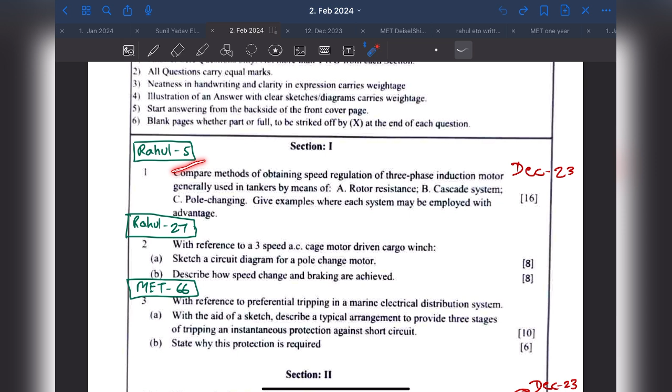Page number 5. I will just open my notes and take you to page number 5. See, the same question I prepared when I was preparing for the exam: Compare methods of speed regulation of three-phase induction motor: rotor resistance, cascade system, and pole changing. Give examples. So you can refer to my notes and also the December 2023 video. So let us move directly to the next question.

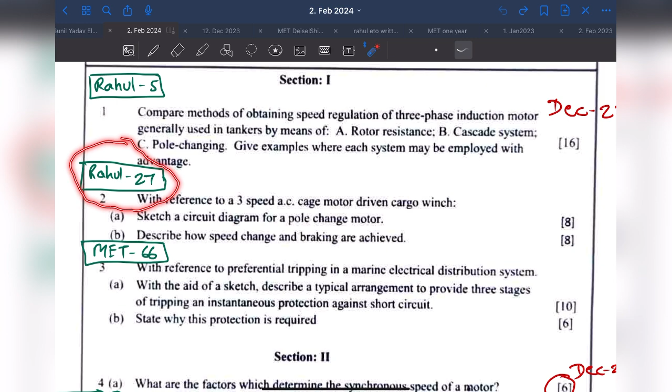Question number 2. With reference to a 3-speed AC cage motor driven cargo winch, sketch a circuit diagram for a pole change motor. Describe how speed change and braking are achieved. You can find the answer to this question on page 27 of my notes. So I will take you to my notes, page 27.

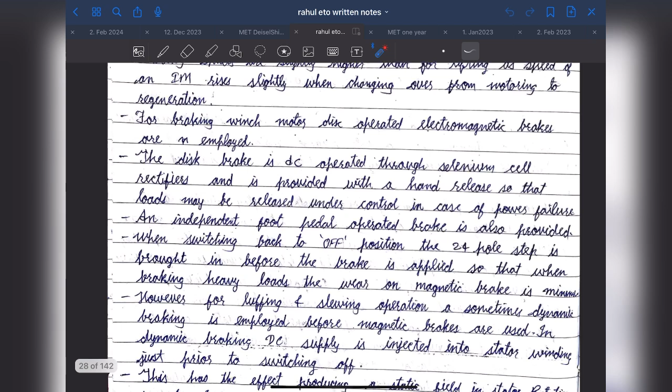So in this case, these windings are connected in parallel, which gives lower number of poles, and therefore higher speed. Different contacts will be made for different speed performance. I have explained the basic fundamental of how this happens, and the rest you can read and understand.

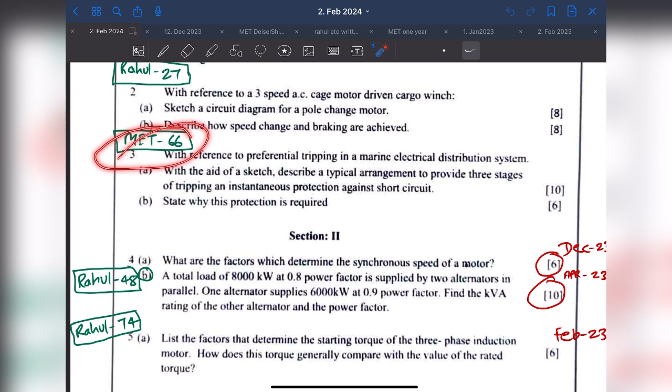You can find the answer to this question in MET 66, page number. So to answer this question, you have the diagram here and the explanation here. That's all - just memorize the diagram, practice it one or two times, and you can remember and write this explanation.

Those working in this field must be aware of what the non-essential trips are and at what stages - 5 seconds, 10 seconds, and 15 seconds. So just explain about the non-essential trips, and this is the mechanical one.

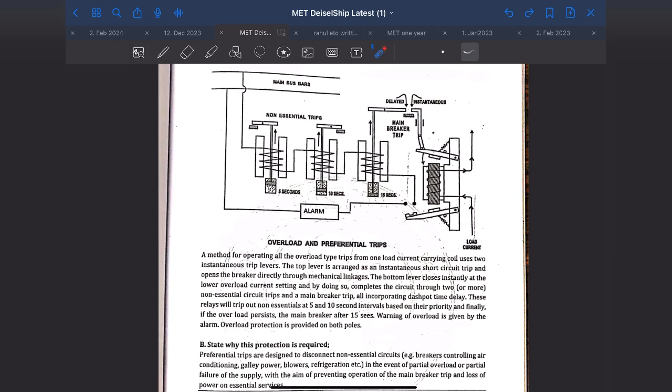Nowadays these are not used on the ship, only electrical electronics current transformers and relays are used for tripping purpose. This may be an old method, but for exam purposes just draw this diagram and write this answer. You can also refer to other books, maybe internet or ChatGPT, to get a more theoretical answer to this.

Now let's move on to section 2, question number 4a. This question was asked in December 2023. I have explained in my video of December 2023 what are the factors which determine the synchronous speed of a motor. Let's move on to question number B.

A total load of 8000 kilowatt at 0.8 power factor is supplied by two alternators in parallel. One alternator supplies 6000 kilowatt at 0.9 power factor. Find the kVA rating of the other alternator and its power factor.

This is a very easy question, worth 10 marks. Just 5 minutes you can answer this question. This question will take 5 to 7 minutes to write the theory part, and this one for 5 minutes. You can answer this question in 10 minutes, it will be easy. The answer you will find at Rahul, page number 48.

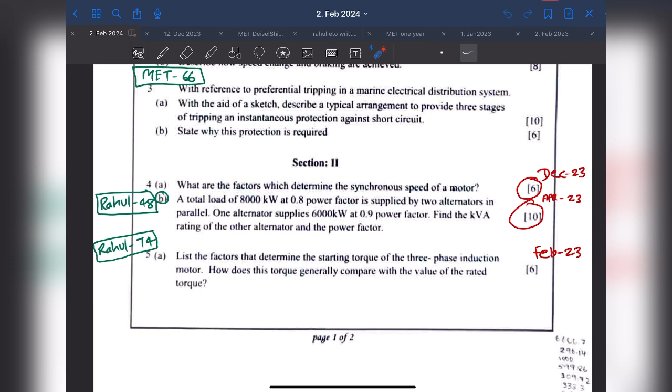Let's move on to page number 48. See the same question - this was also asked in April 2023, and I had prepared all these questions when I was preparing, so all these questions are repeating only. So total load is 8000 kilowatt at 0.8 power factor.

Now you know the kilowatt and you know the power factor, so what can you find out from this? You can find the kVA. kVA will be kilowatt divided by power factor, because power factor equals kilowatt by kVA. Now you know these two parts, so you can easily calculate kVA. So kVA we got is 10,000 kVA.

Now we can find total kVAR, which is the reactive power. You know kVA is the square root of kilowatt squared plus kVAR squared, so from this we can find the kVAR: 10,000 squared minus 8,000 squared, under root, gives us 6,000 kVAR. So this is our total requirement: 8,000 kilowatt, 6,000 kVAR reactive power, and 10,000 kVA total.

Now let's see how much generator A is supplying. Generator A is supplying 6,000 kilowatt at 0.9 power factor. So out of the total 8,000 kilowatt, 6,000 is provided by generator A at power factor 0.9. Now calculate how much kVA is supplied by A using the same formula. We are getting 6.6 MVA.

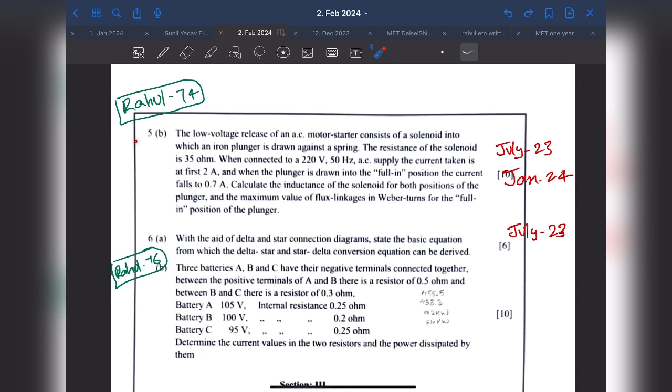We will move to the next question. With the aid of delta and star connection diagrams, state the basic equations from which delta-star and star-delta conversion equations can be derived.

A similar question was asked in July 2023, the same month in which I gave my exam, but I did not attempt this question. I had attempted the other two numericals instead. The answer is already there on page number 76 of my notes. Again, this is a theory question only from our college time.

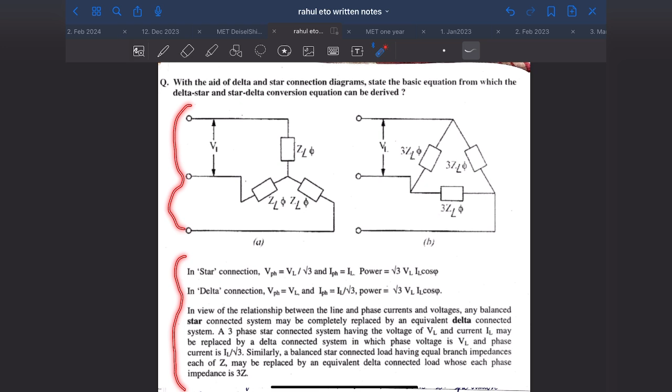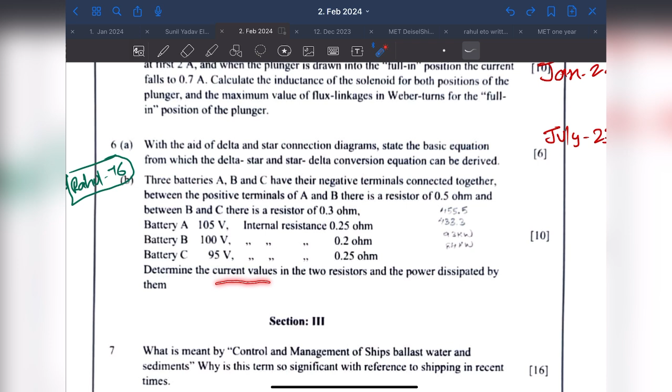Three batteries A, B, C have their negative terminals connected together. Between positive terminals A and B, there is a resistance of 0.5 ohms. Between B and C, there is a resistance of 0.3 ohms. Battery A is 105 volt, battery B is 100 volt, and battery C is 95 volt, and their internal resistances are given. Determine the current values in the two resistors and power dissipated by them.

So the answer is available on page 76 of my notes. We'll go to page 76. This is answered - first, draw the diagram as given in the question.

Three batteries are given: 105 volt, 100 volt, and 95 volt. The negative terminal of all three batteries are connected together, so we are connecting the three terminals here. Now this is the internal resistance: 0.25 of this battery, 0.2 of this battery, and 0.25 of this battery. And what is given? There are two resistances - 0.5 ohm connected between battery A and B, and 0.3 ohm connected between battery B and C. So here we got the simple diagram.

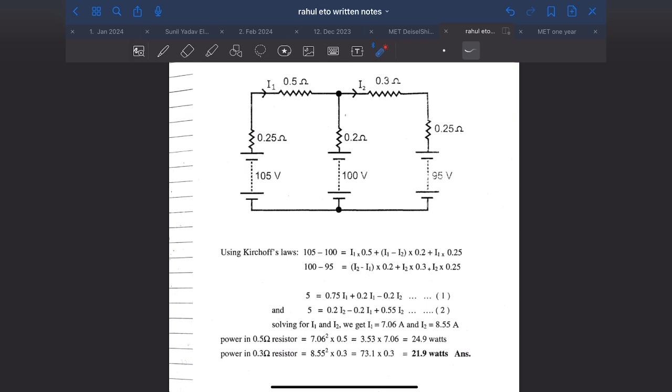Now we can simply apply Kirchhoff's voltage law here: current I1 here and current I2 here, and equate both equations, we will simply get the answer. So let's apply Kirchhoff's voltage law in loop 1.

So now we start from here. So 105 minus 0.25 into I1, minus 0.5 I1, now going downward here, minus 0.2 into (I1 minus I2), because current I1 is coming here and current I2 is going upward. So the resultant is I1 minus I2 minus 100 is equal to 0.

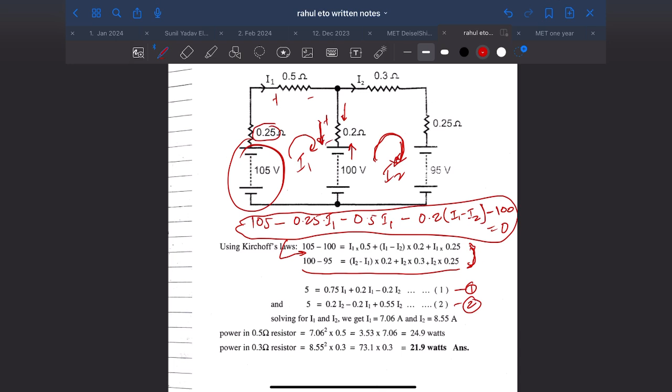Solving this equation gives what is written here. Similarly, writing the equation in loop 2 will give this equation, and simplifying these two equations we'll get equation number 1 here and equation number 2 here. We'll solve these two equations and get the value of I1 and I2: 7.06 and 8.55.

The question asks for the power in the 0.5 ohm resistor. So the power formula we already know is I square into R. I1 is 7.06, so 7.06 squared into 0.5 for that resistance, we are getting 24.9 watts. And power in the 0.3 ohm resistor: 8.55 squared into 0.3, we are getting 21.9 watts.

This is also a simple question from our college time only. The current, voltage, and power equations we have to solve and get the answer.

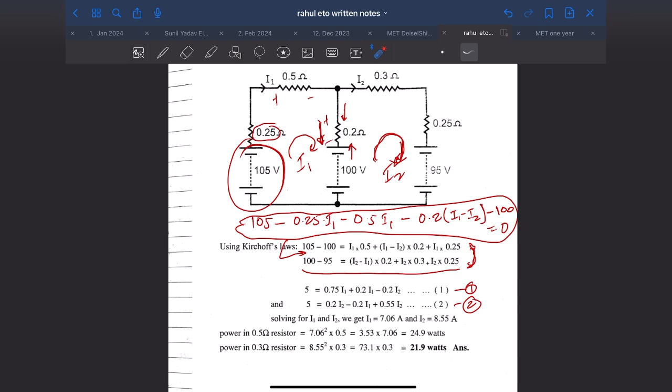Now we have come to the last section of this question paper, section 3, question number 7. What is meant by control and management of ships' ballast water and its sediments? Why is this term so significant with reference to shipping in recent times? All must be aware what ballast water and sediments are, and why the management of ballast water is very very important, and how ETOs are related to this.

So first start by saying what ballast water is and why it is needed, how it helps the ships when the ship is sailing without any cargo, or how it helps in navigation and stability of the ship. Now start by quoting what the problems of ballast water are, how it can affect the environment if discharged without treatment, and what are the different methods of treatment.

Like ballast water treatment system is a very important job of ETOs to manage all those things. So there can be electrolysis process or the chemical or the UV lamps, whatever types of ballast water, you can write and you can explain few lines about each and what are the advantage and disadvantage of everything. So simply just write your question in ChatGPT and you get the answer.

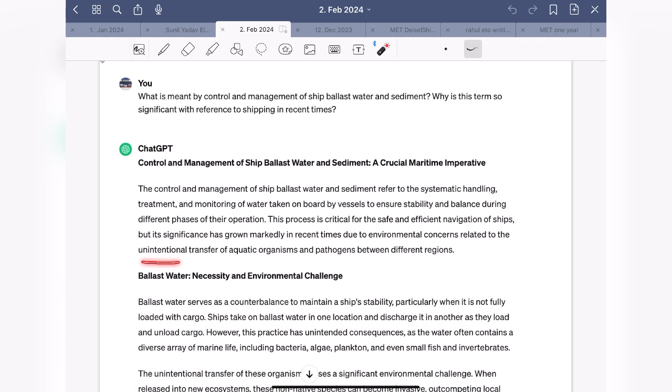The control and management of ship ballast water sediment refers to systematic handling, treatment, monitoring of water taken on board vessel to ensure stability and balance during different phases of their operation. This process is critical for the safe and efficient navigation of ships, but its significance has grown markedly in recent times due to environmental concerns related to unintentional transfer of aquatic organisms and pathogens between different regions.

Ballast water necessity and environmental challenge. Ballast water serves as a counterbalance to maintain ship's stability, particularly when it is not fully loaded with cargo. Ships take on ballast water in one location and discharge it in other as they load and unload cargo. However, this practice has unintended consequences as the water often contains a diverse array of marine life, including bacteria, algae, plankton, and even small fishes and invertebrates.

So, the unintentional transfer of these organisms poses significant environmental challenges. When released into new ecosystem, these non-native species can become invasive, outcompeting local species, disrupting ecosystem and causing economical and ecological harm. This phenomena is a consequence of global nature of shipping as vessels traverse oceans and seas, facilitating the movement of organisms from one part of the world to another.

What are the environmental implications and global concerns? The significance of controlling and managing ballast water and sediments is underscored by potential ecological and economic consequences of invasive species introduction. Aquatic invasive species can lead to loss of biodiversity, alter food webs, damage fisheries, and aquaculture operations. In some instances, they can even impact human health through transmission of disease.

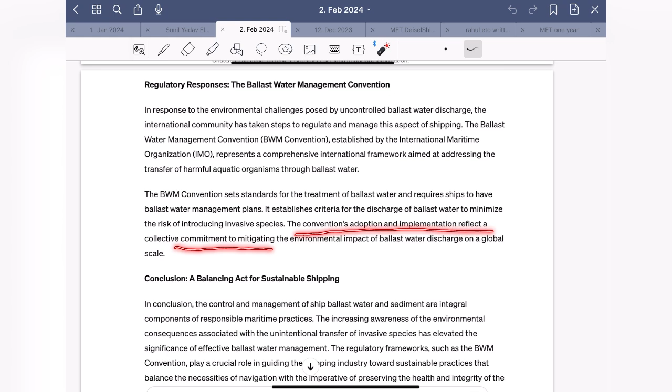The convention's adoption and implementation reflect a collective commitment to mitigate the environmental impact of ballast water discharge on a global scale. Conclusion: a balancing act of sustainable shipping. In conclusion, the control and management of ships' ballast water and sediments are integral components of responsible maritime practices. The increasing awareness of environmental consequences associated with unintentional transfer of invasive species has elevated the significance of effective ballast water management.

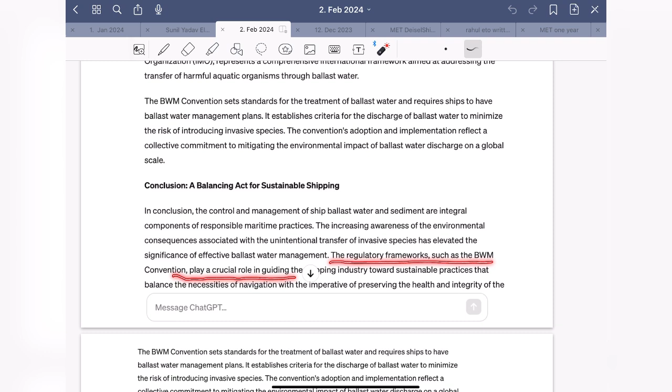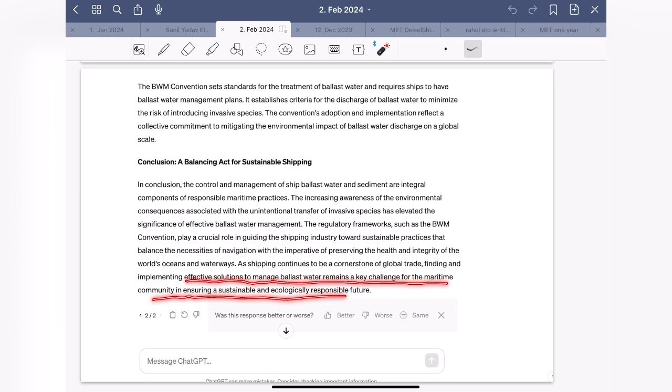The regulatory framework such as BWM conventions plays a crucial role in guiding the shipping industry towards sustainable practice that balances the necessities of navigation with the imperative of preserving the health and integrity of the world's ocean and waterways. As shipping continues to be cornerstone of a global trade, finding and implementing effective solutions to manage ballast water remains a key challenge for maritime community in ensuring a sustainable and ecologically responsible future. Let's move on to next question.

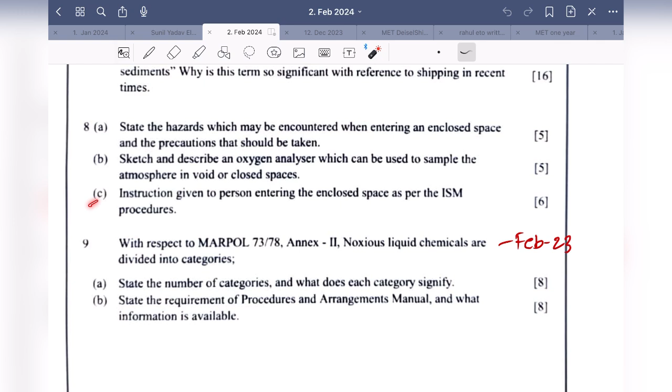Question 8. State the hazards which may be encountered when entering an enclosed space and precautions that should be taken. Sketch and describe an oxygen analyzer which can be used to sample the atmosphere in void or closed space. C. Instructions given to person entering the enclosed space as per ISM procedures. So simply type the question in ChatGPT and you get the answers.

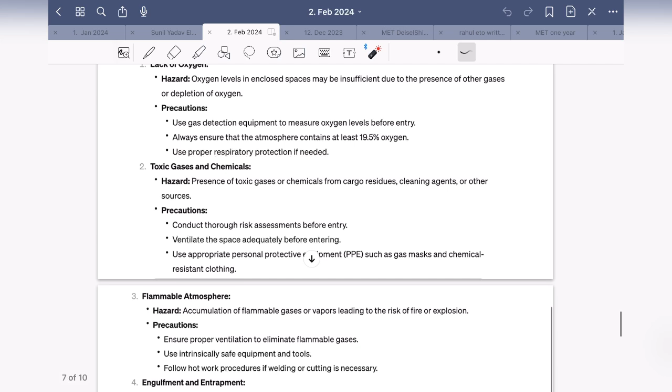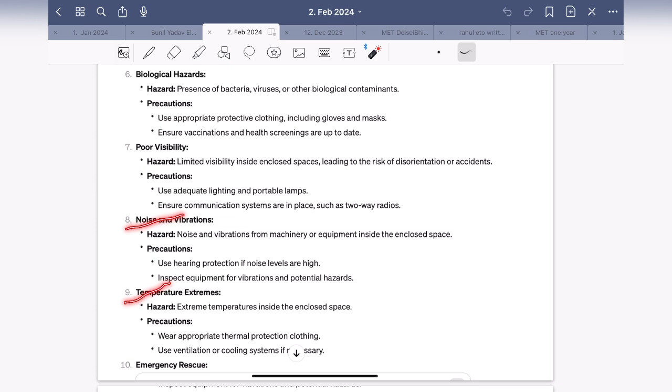So what are the hazards? First hazard is lack of oxygen. Second is toxic gas and chemicals. Third is flammable atmosphere. Fourth is engulfment and entrapment. Structural hazards, biological hazard, and poor visibility, noise and vibration, temperature extremes, then emergency rescue. So these are the hazards which you may encounter while entering an enclosed space. Now all of you must be having experience of entering into enclosed space while you work onboard.

I am sure at least one or two times you must have got the chance. So you already know the procedures, what are the things you carry out, what are the checks you carry out. First of all, lack of oxygen. Oxygen level in an enclosed space may be insufficient due to presence of other gases. What are the precautions we take? Gas detection equipment to measure oxygen level before entry. Always ensure that the atmosphere contains at least 19.5% oxygen. Use proper respiratory protection if needed.

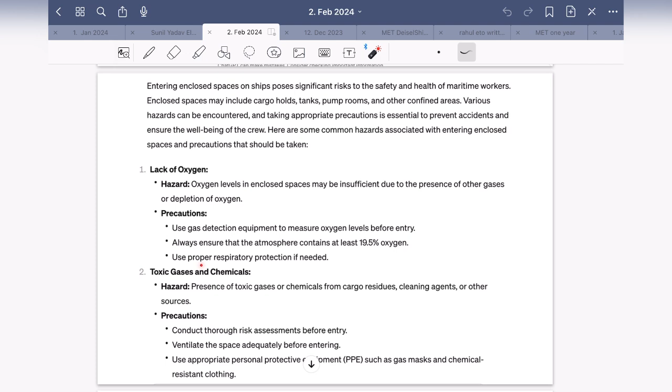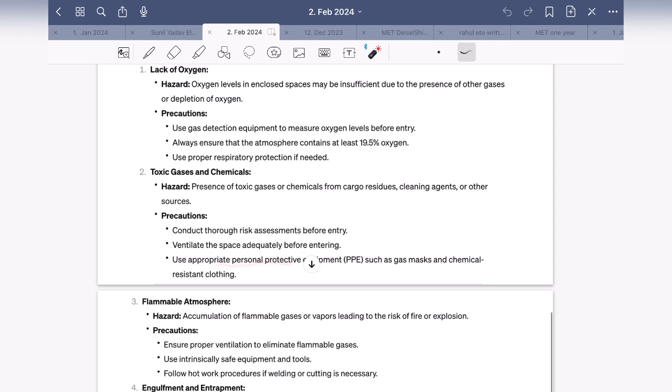Now, toxic gases and chemicals. Presence of toxic gas and chemicals from cargo residue, cleaning agents, and other sources. What are the precautions we take? Conduct a thorough risk assessment before entry. Ventilate the space adequately before entering. Use appropriate PPE such as gas mask and chemical resistant clothing.

Flammable atmosphere: accumulation of flammable gases or vapors leading to risk of fire or explosions. What are the precautions we take? Ensure proper ventilation to eliminate flammable gases. Use intrinsically safe equipment and tools. Follow hot work procedure if welding or cutting is necessary.

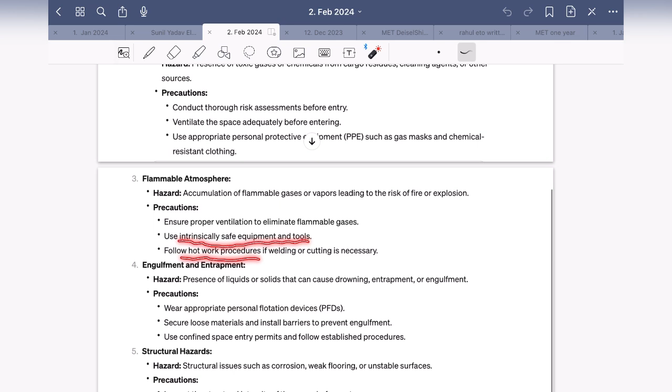Engulfment and entrapment. Presence of liquids or solids that cause drowning, entrapment, or engulfment. Wear proper personal flotation devices. Secure loose materials and install barriers to prevent engulfment. Use confined space entry permits, and follow established procedures.

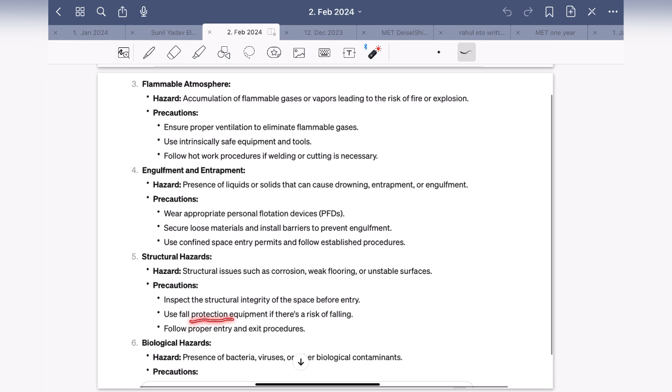Structural issues such as corrosion, weak flooring, or unstable surface. Inspect the structural integrity of the space before entry. Use fall protection equipment if there is risk of falling. Follow proper entry and exit procedure. Then biological hazards: presence of bacteria, viruses, or other biological contaminants. Use appropriate protective clothing, including gloves and masks. Ensure vaccination and health screenings are up to date.

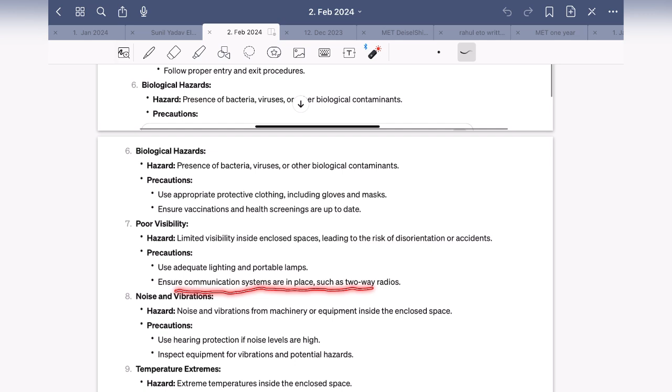Poor visibility: limited visibility inside the enclosed space, leading to risk of disorientation and accidents. What are the precautions? Use adequate lighting and portable lamps. Ensure communication systems are in place, such as two-way radios. Noise and vibrations from machinery or equipment inside the enclosed space. Precautions: use hearing protection if noise levels are high. Inspect equipment for vibration and potential hazards.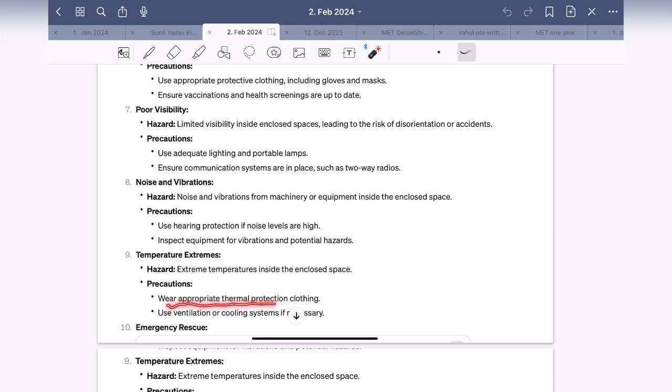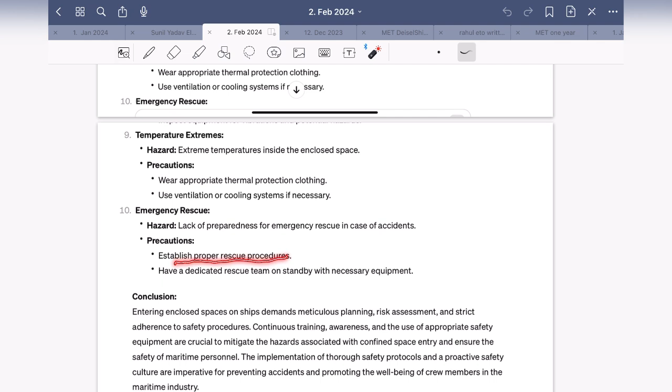Temperature extremes. Temperatures inside the enclosed space can be very high. Wear appropriate thermal protection clothing. Use ventilation or cooling system if necessary. Then emergency rescue: lack of preparedness for emergency rescue in case of accident. Precautions: establish proper rescue procedures. Have a dedicated rescue team on standby with necessary equipment.

Now let's see section C first, and then we'll go back to section B, in which you have to draw the oxygen analyzer and explain the functioning. So, instructions given to a person entering the enclosed space as per ISM procedure. ISM is International Safety Management. It gives guidelines and procedures to enter the enclosed space. The first one is risk assessment. Conduct a thorough risk assessment. Identify potential hazards associated with a specific enclosed space. Evaluate the atmosphere for oxygen levels, toxic gas, flammable substances. Consider structural integrity, temperature, and any other relevant factors.

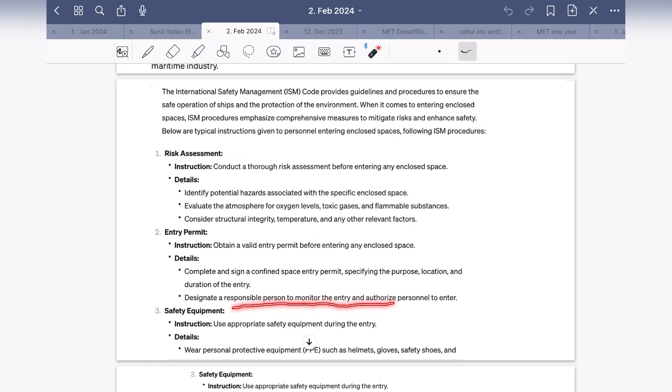Second is entry permit. Instructions: complete and sign a confined space entry permit specifying purpose, location, and duration of entry. Designate a responsible person to monitor entry and authorize personnel to enter. Safety equipment. Wear personal protective equipment such as helmet, gloves, safety shoes, and appropriate clothing. Use full body harness and lifeline if there is a risk of falling. Gas detection. Check oxygen levels to ensure they are within safe limits. Test for presence of toxic gases and flammable substances. Calibrate gas detectors before use.

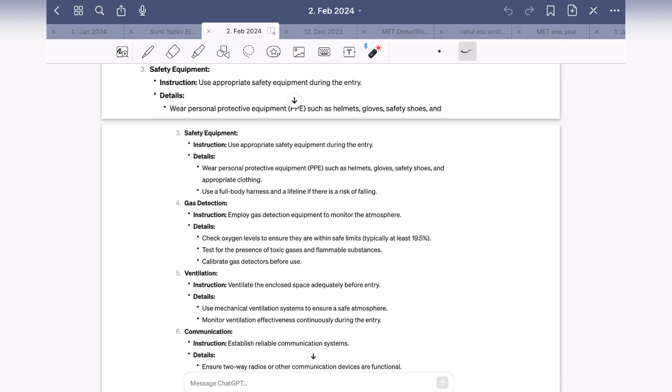Ventilation. Use mechanical ventilation system to ensure a safe atmosphere. Monitor ventilation effectiveness continuously during the entry. Communication. Ensure two-way radios or other communication devices are functional. Implement communication checks before entry. Entry team composition. Form a qualified entry team. Assign roles and responsibilities to team members. Ensure that team members are trained in confined space entry procedures. Emergency procedures should be in place. Provide training on emergency response measures, including rescue and evacuation. Conduct regular drills to ensure readiness.

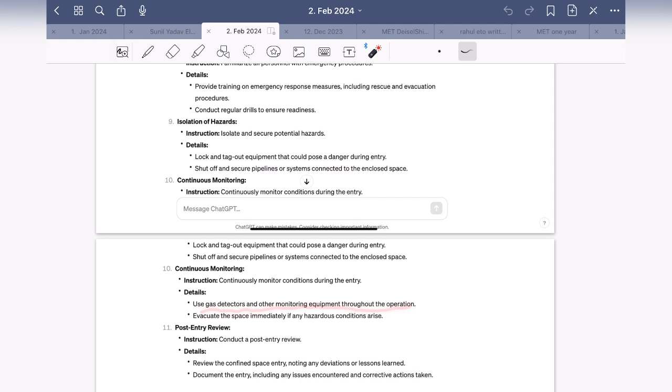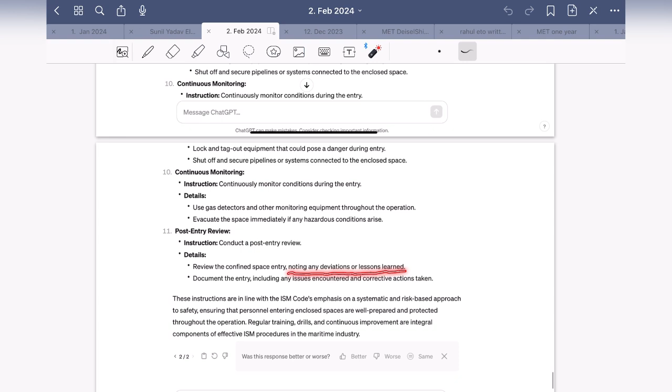Isolation of hazards. Isolate and secure potential hazards. Lock out and tag out equipment that could pose a danger during entry. Shut off and secure pipelines and systems connected to the enclosed space. Continuous monitoring. Use gas detectors and other monitoring equipment throughout the operation. Evacuate the space immediately if hazardous conditions arise. Post entry review. Conduct a post entry review. Review the confined space entry, noting any deviations or lessons learned. Document the entry, including any issues encountered and corrective actions taken.

Now, next is the fixed oxygen analyzer diagram and explanation. There are three types of oxygen analyzer. It is given in the MCT book, Marine Control Technology, which is written by Elstan Fernandez, sir.

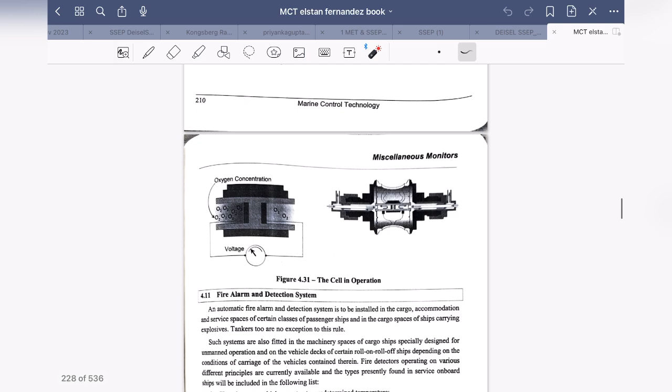Just read this. Then next one is Zirconia oxygen analyzer. Now read and understand whatever you feel is easy to understand. You take that and make notes of your own in your own words. That will be easy for you to remember. See which diagrams you can draw, which is easy for you, and you can write in the answer. So just take the screenshot of all these answers and prepare your own notes for this.

Now let's move on to the last question of the question paper. Question number 9. With respect to MARPOL 73/78 Annex 2, noxious liquid chemicals are divided into categories. State the number of categories and what does each category signify. This question was asked in February 2023. Answer you can find in Rahul, page number 78. Part B answer I will give you separately. Only part A answer is given in my notes.

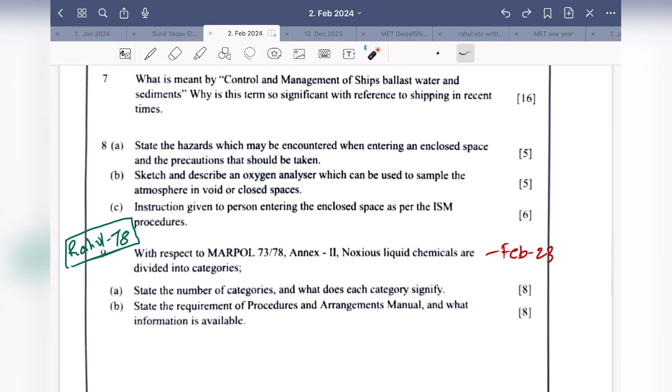This is a different question in February 2023. Slightly additional question they have added in this. So Rahul, it is page number 78. If you go, question same. So there are three categories in which noxious liquids can be categorized: category X, category Y. Just read what is given in X, Y, and category Z.

Now there is a fourth one, other substances, that fall outside category X, Y, Z and are considered to present no harm to the marine environment when discharged into sea. The discharge of bilge or ballast water or other residues containing these substances are not subject to any requirement of MARPOL Annex 2. So these are the categories in which noxious liquids can be divided.

Now we just read this, very simple only. Category X, which is very harmful, toxic, which cannot be discharged, and category Y, there is some relaxation. Category Z, there is more relaxation, likewise. So now we will go to the next part of the question, which is state the requirement of procedures and arrangements manual and what information is available.

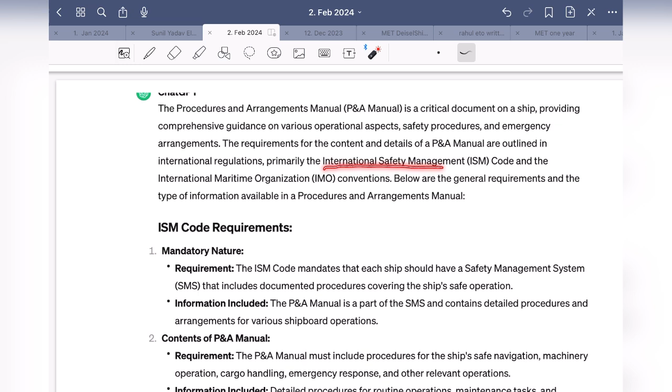The procedure and arrangement manual, also called P&A manual, is a critical document on a ship, providing comprehensive guidelines on various operational aspects, safety procedures, and emergency arrangements. The requirements of the content and details of a P&A manual are outlined in international regulations, primarily ISM code and IMO. Below are general requirements and types of information available in P&A manual.

So, what are ISM requirements? Mandatory in nature. ISM code mandates each ship should have a safety management system that includes documented procedures covering the ship's safe operation. P&A manual is a part of SMS and contains detailed procedures and arrangements for various shipboard operations.

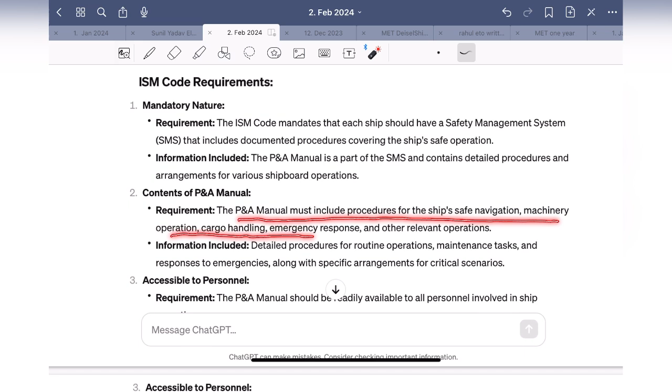Contents of P&A manual. P&A manual must include procedures for the ship's safe navigation, machinery operation, cargo handling, emergency response, and other relevant operations. Information included: detailed procedures for routine operations, maintenance tasks, and response to emergencies, along with specific arrangements for critical scenarios. And it should be accessible to all the crew involved in ship's operations, ensuring they can refer to it as needed.

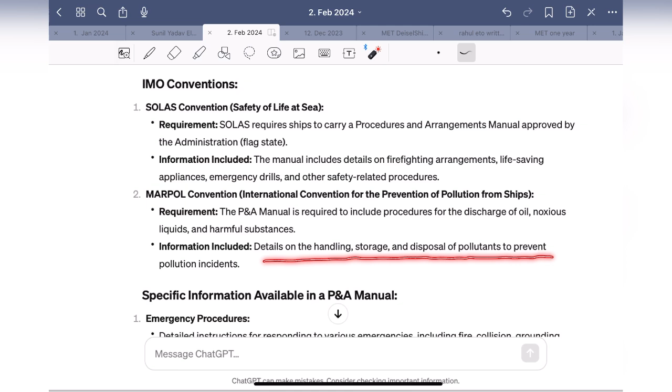What does IMO convention say about this? SOLAS requires ships to carry a procedure and arrangement manual approved by the administration, that is flag state. Manual includes details on firefighting arrangements, life-saving appliances, emergency drills, and other safety-related procedures. MARPOL says P&A manual is required to include procedures for discharge of oil, noxious liquids, and harmful substances. Details on handling, storage, and disposal of pollutants to prevent pollution incidents.

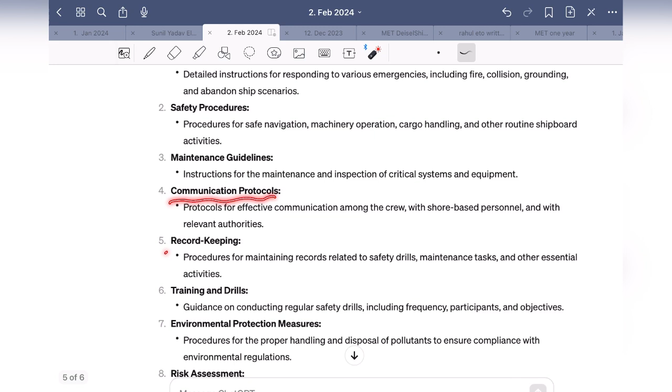Now, what is the information available? Emergency procedures, safety procedures, maintenance guidelines, communication protocols, record keeping, training and drills, environmental protection measures, risk assessment, authority and responsibility, checklists and forms. So all these points you can write in your answers.

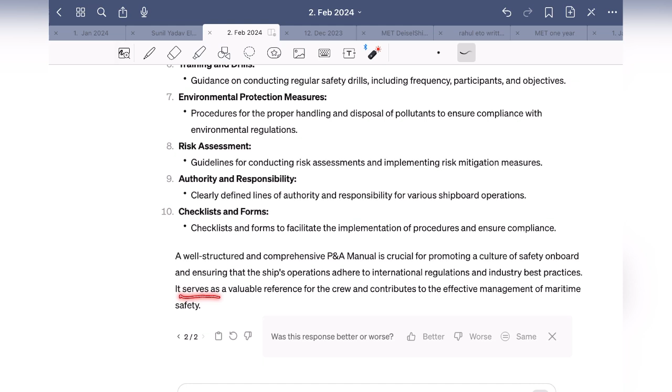A well-structured and comprehensive P&A manual is crucial for promoting a culture of safety on board and ensuring that ship operations adhere to international regulations and industry best practices. It serves as a valuable reference for the crew and contributes to effective management of maritime safety. Okay, so with this, we come to the end of the discussion for the February 2024 question paper.